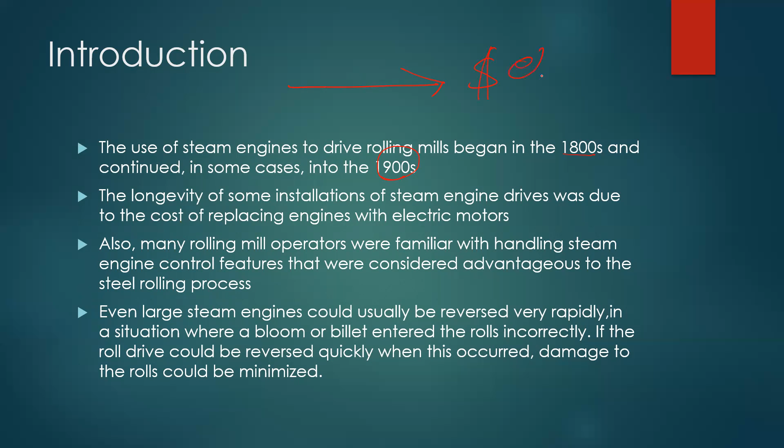Also, many rolling mill operators were familiar with handling steam engine control features that were considered advantageous to the steel rolling process. The steam engines were used to roll steels into different forms, and many manufacturers of this are familiar with steam engines.

Even the large steam engines could usually be reversed very rapidly. Let us take a situation, like when a bloom or billet entered the rolls incorrectly. Suppose the steel has to be entered like this and it entered somewhat at an angle. The steam engine is used to reverse this and it can be made again to the regular way, whereas in an electrical way, it cannot be replaced. If the roll drive could be reversed quickly when this occurred, the damage to rolls could be minimized.

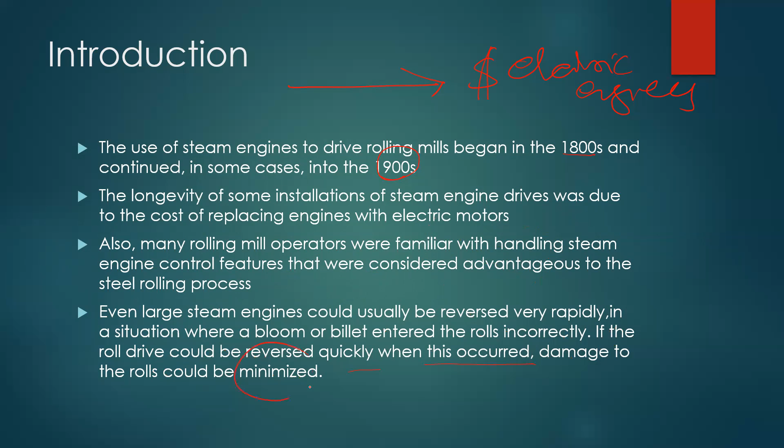First of all, the mill was 32 inches in size, a two high reversing slab mill that used both horizontal and vertical rolls to shape the slab. The horizontal rolls were driven by a 6,000 horsepower steam engine geared to the roll stand. The vertical rolls were driven directly by a 2240 horsepower engine. The horizontal rolls rotate like this to flatten the steel, and the vertical rolls move up and down and flatten the steel into shapes.

Rollers for the feed tables on both sides of the main roll stand were driven by double engines. Each of the engines consisted of two identical cylinders operating in parallel, doubling the available horsepower. As two engines are provided and are connected in parallel, the output horsepower is doubled.

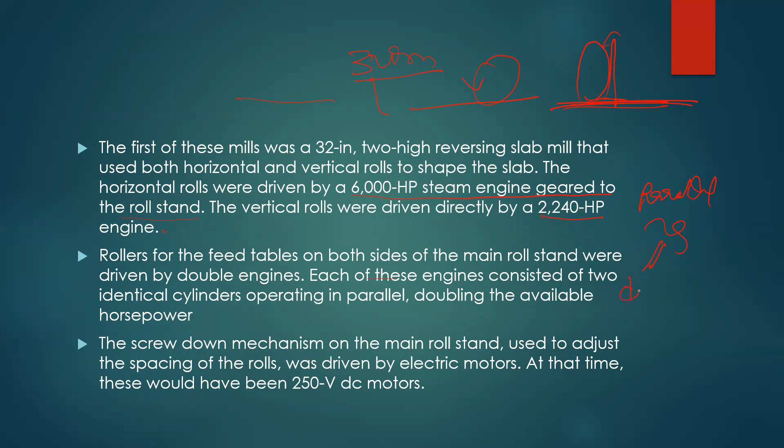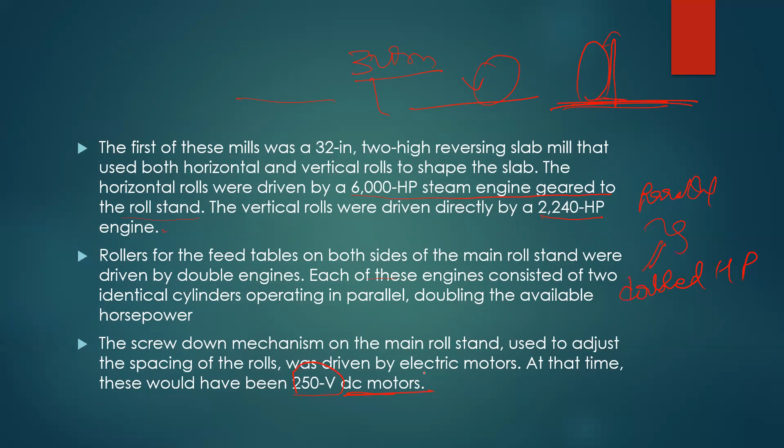Let us discuss the history of the Bethlehem Steel Company, its origin, the founder, and how the different kinds of steam engines were developed there. Let us discuss the founder. The founder of the Bethlehem Steel Corporation was Charles M. Schwab, one of Andrew Carnegie's principal lieutenants. Schwab played a major role in the formation of the United States Steel Corporation in 1901. He was also the first president of US Steel, but resigned because he was not given a freer hand in running the corporation.

In 1904, Schwab organized Bethlehem Steel Corporation. That is, in 1904, Bethlehem Steel Corporation was founded, and he took over its direction as president and chairman of the board. Today, Bethlehem Steel is the nation's second largest, that is USA's second largest, steel production company, engaged primarily in the manufacture and sale of a wide variety of steel mill products.

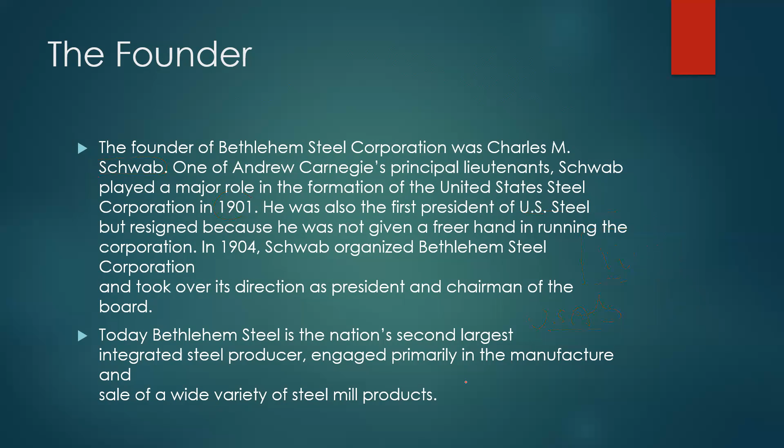The origin of Bethlehem. October 20, 1995, marked the end of the 87-year-old 48-inch Grey mill making steel beams with steam power at Bethlehem Steel Corporation. That is, the company was founded in 1904 and in 1995, October 20, the company stopped producing the

steam engines. The Bethlehem, Pennsylvania mill was the heart of Charles Schwab's dream to enlarge his Bethlehem Steel Company into one of the country's great steel producers. It was a foundation upon which the giant Bethlehem Steel Corporation would rise. The mill was designed by Henry Grey, with construction supervised by Eugene Grace.

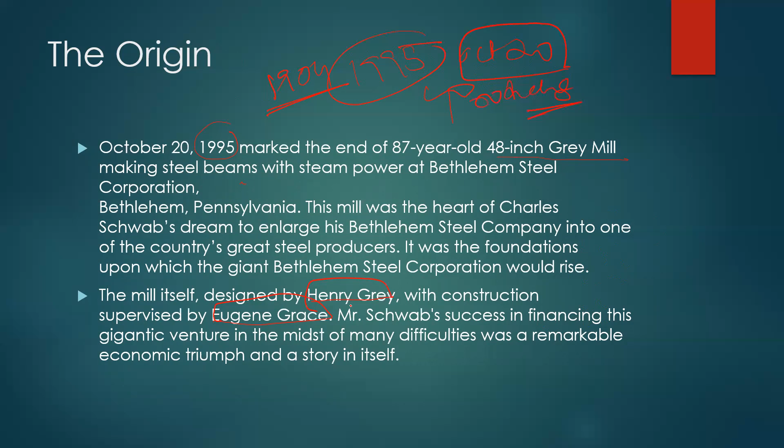Mr. Schwab's success in financing this gigantic venture in the midst of many difficulties was remarkable. The economic triumph speaks for itself. As you know, in the 1900s we were facing an economic crisis, and Schwab providing the finance for this venture can be considered a triumph.

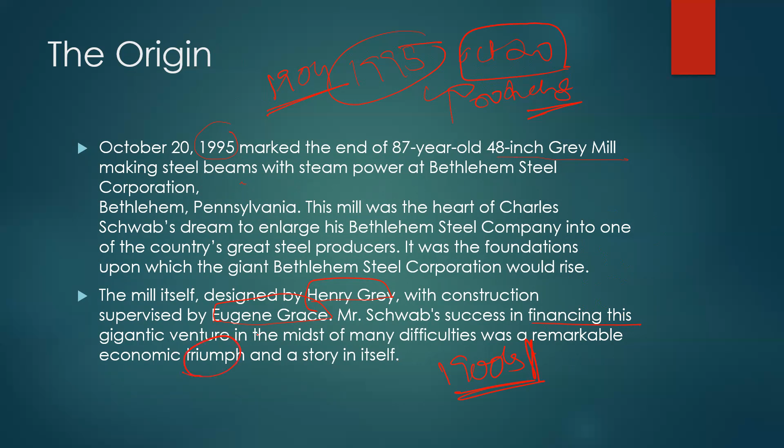The 46-inch Blooming Mill's 14,000 horsepower twin tandem compound steam engine. It was built in 1916 by Wm. Tod Company. It is placed in Youngstown, Ohio. The size of the steam engine was 40-inch to 66-inch to 54-inch.

The steam pressure to run it is 150 psi, and the machine needs 75,000 pounds per hour. The shipping weight, that is the weight to ship the product, is 950,000 pounds. As originally conceived, the new mill would be required to manufacture beams varying in depth from 30

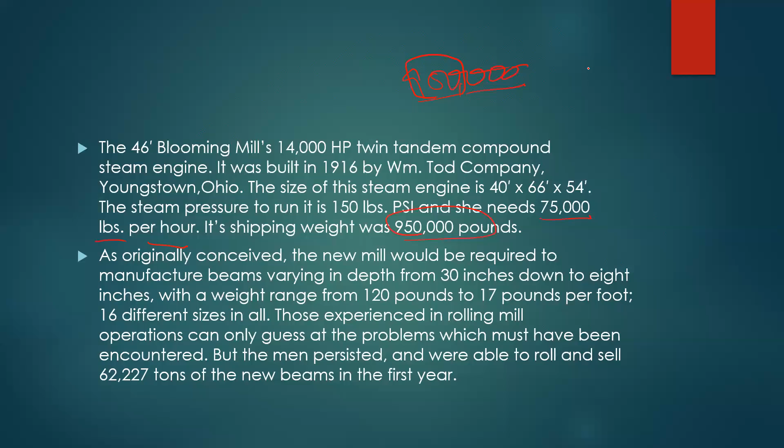inches down to 8 inches, with a weight range of 120 pounds to 17 pounds per foot. That is, the mill should produce long beams to short beams, which weigh higher or which weigh low. The mill should produce both required components, 16 different sizes in all.

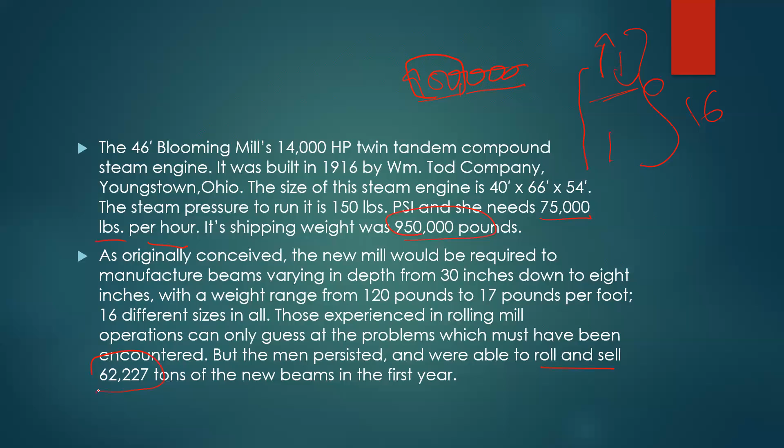Those experienced in rolling mill operations can only guess at the problems which must have been encountered. But the men persisted. The men at Bethlehem Corporation persisted and were able to roll and sell 62,000 tons of the new beams in the first year of production.

The 48-inch Grey mill was run by a 20,000 horsepower twin tandem compound engine, reversing, with a 28-inch crankshaft steam engine. The valve gear was piston valves, single control lever, Walschaert, and she ran at a safe speed of 125 rpm. The crankshaft used to run at 125 rpm.

It was built in 1916 by William Tod Company again, which is located at Youngstown, Ohio. The size of the steam engine was 46 inches, 76 and 72 inches. The steam pressure to run this was 150 pounds psi in the high pressure cylinder and 60 pounds psi in the low pressure cylinder. As we have discussed, it has two cylinders.

The steam consumption for these engines was 98,000 pounds per hour. The total shipping weight from Ohio was 1,675,000 pounds. And in 1916, the engine cost around $110,000. But in the present day this would cost around $1 million. That is 10 times compared to then.

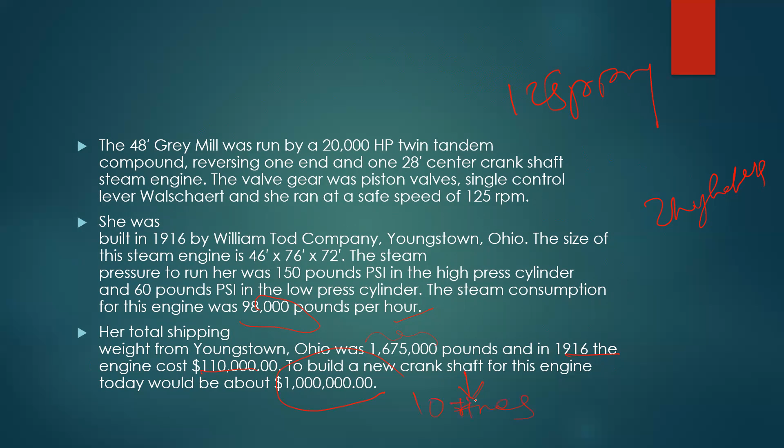The basic design which was used in construction of this 48-inch mill remains the standard by which all wide flange mills are designed. This gives the old 48-inch the capability to be used in conjunction with modern add-on equipment such as computers and electric mill drive, which increased its production rate to even greater heights.

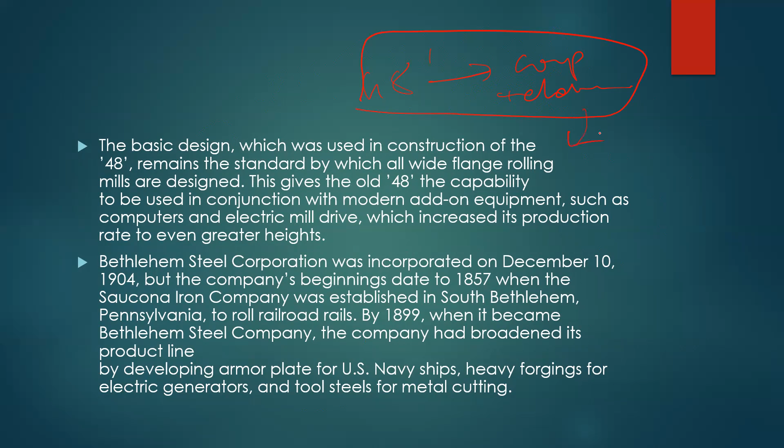When this 48-inch was added to computers and electric drive mills, it has higher capacity, is more futuristic and has more capabilities. This increases the production to greater heights.

Bethlehem Steel Corporation was incorporated on December 10, 1904, but the company's beginning dates to 1857, when the Saucona Iron Company was established in South Bethlehem, Pennsylvania, to roll rails. By 1899, when it became Bethlehem Steel Company, the company had broadened its product line by developing armor plate for US Navy ships, heavy forgings for electric generators, and tool steel for metal cutting.